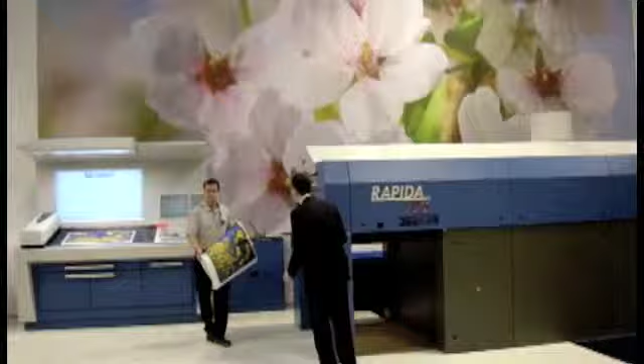It looks like the press has stopped. Marcus, do we have a problem? Oh, I see. The job's already finished. Now, our friend Gopher, the automatic guided vehicle from our Spanish partner Asti, will come to collect the printed sheets. And while the first job is being transferred to the finishing area for cutting, Marcus will change the plates and substrate for the next job.

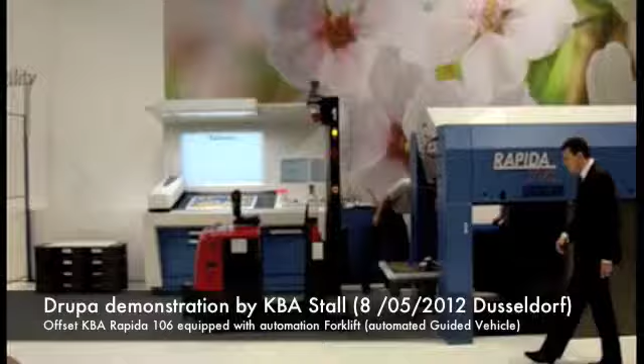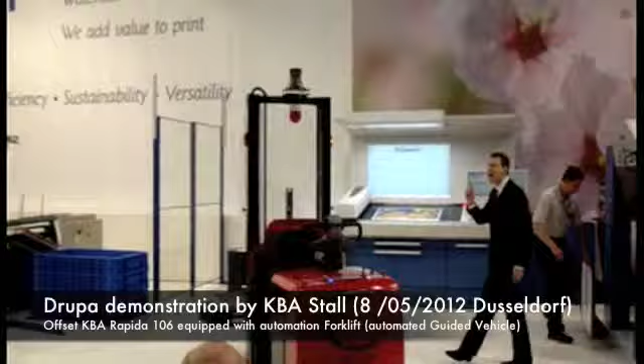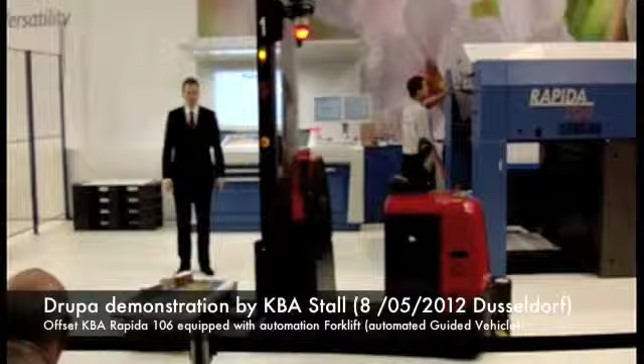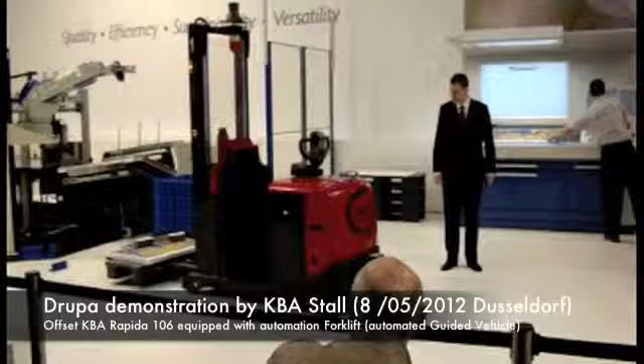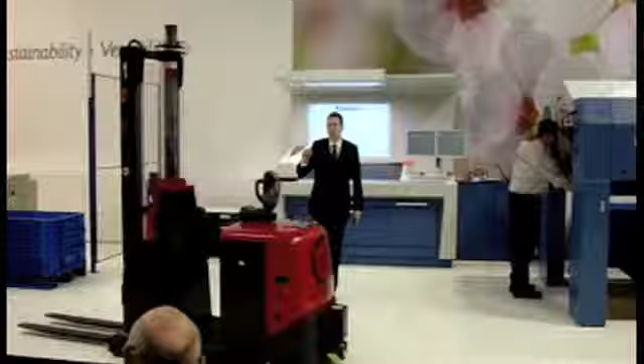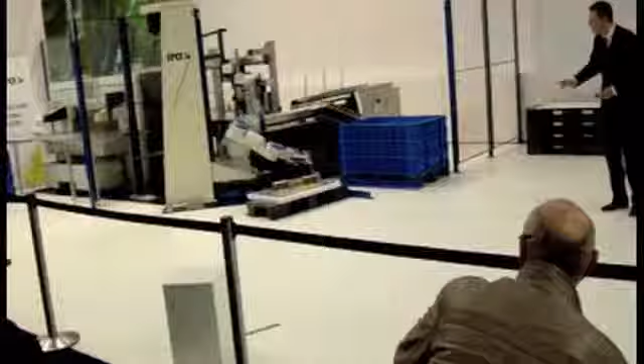Come and join us, ladies and gentlemen. We're going to have a graphic industry world premiere in about a second now. Good job, Gopher. It looks like our pallet has been delivered, and Rob can now swing into action. Ladies and gentlemen, this is the world premiere for a two-armed robot in the graphic arts industry, brought to you by Toray and IRA. Rob will look for and remove any obstructions or foreign objects. He will then check the exact height of the top sheet and get into action, lifting the paper onto the vibration table for further processing.

There is of course a limit to the number of sheets that can be handled at a time, so he will repeat this task a few times. Rob was developed in cooperation with the University of Southern Denmark and Linköping University in Sweden, and IRA has designed a proprietary gripper system and software that adapts the famous Motoman technology to the printing industry. While Rob is busy, let's come back to the press.

This particular KBA Rapida 106 is fitted with a plate loading system that changes the plates automatically in less than 4 minutes. The characteristic green-colored Toray Waterless CTP plates that are fed into the press are really special. These plates are covered with a silicone coating which repels the ink in the non-image area. The plates can be imaged by any plate setter with an 830 nanometer thermal laser.

Image resolution up to 300 LPI is possible, depending on the plate type, and a run length up to 100,000 impressions can be achieved. I should stress that our plates are developed in a plate processor that uses only a fraction of the chemicals needed for processing conventional printing plates, which means that in addition to incredible quality, the Toray Waterless process is also easy on the environment.

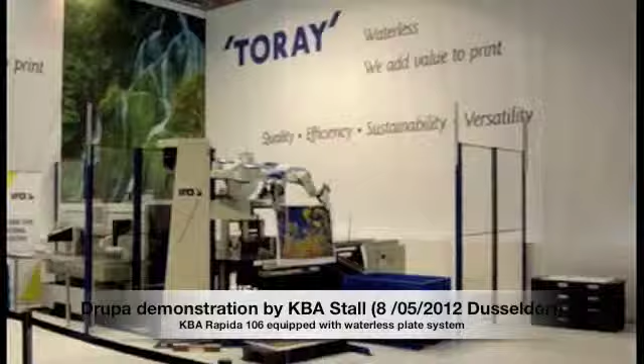Marcus is going to briefly stop the press after a few sheets to check the quality, which is a normal procedure when printing on expensive materials. In today's world, with decreasing run lengths, the low make-ready waste of Waterless has a great impact on your bottom line, and even more so when you use costly materials like print packaging and security products. Starting production with Waterless is also faster and easier than with conventional offset because there's no ink-water balance to adjust.

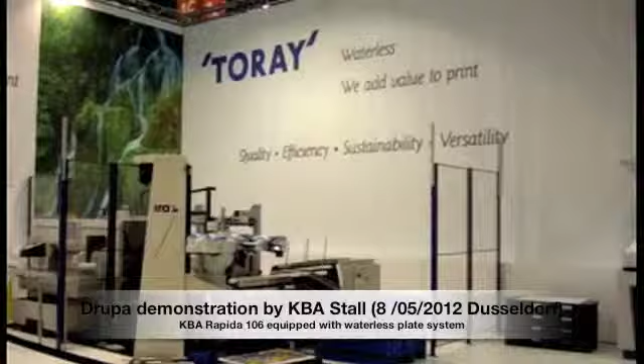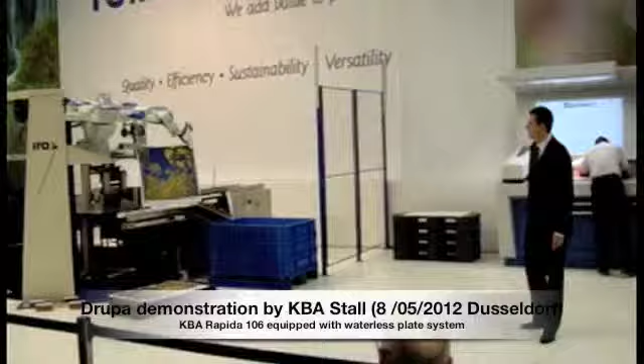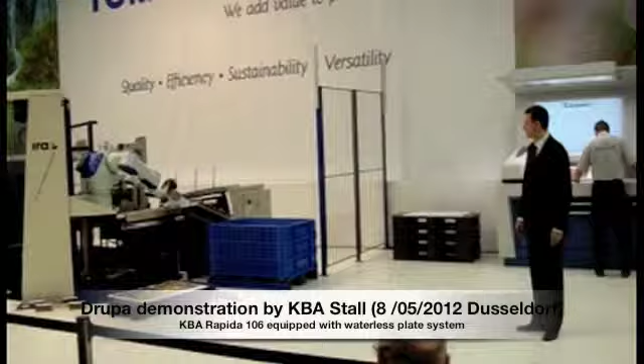Hey Rob, how's it going? Twist and shake? Rock around the clock? Shift after shift, day after day. That's no problem for this guy. Rob will never call in sick with a bad back. Look at that. Poetry in motion. That's the future, ladies and gentlemen. Could be your present, as a matter of fact. Good job, Rob. Look at that. He's even cleaning up. You know what they say in Germany? Ordnung und Sauberkeit muss sein. Good housekeeping is a must.

And now that the material has been transferred onto the pile on the jogging table, the printing job will disappear into the Perfecta cutting machine, a combination of high-speed guillotine, automatic loading module, and jogging table.

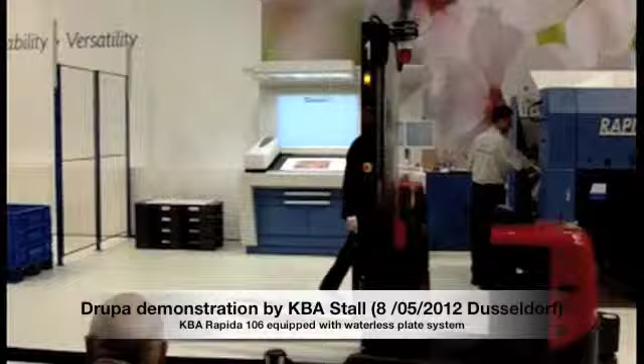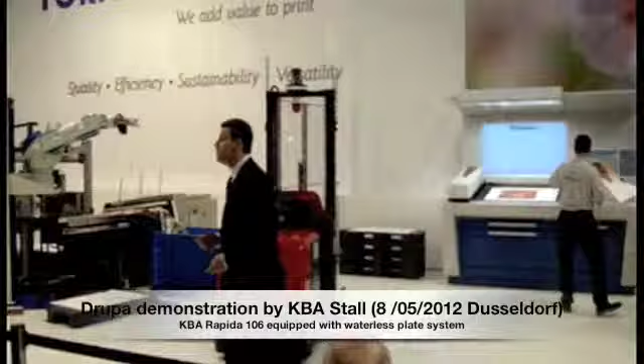Back to our process. One thing we haven't talked about yet are the ink characteristics, which play a very important role in waterless printing. Sahara UV Cure ink from classic colors lets you switch between paper and non-absorbent substrates like different kinds of plastic or metallized materials without changing the ink. And that's a critical factor for achieving maximum productivity. Waterless is such a valuable tool for printers who are seeking to expand their product range and increase their profits.

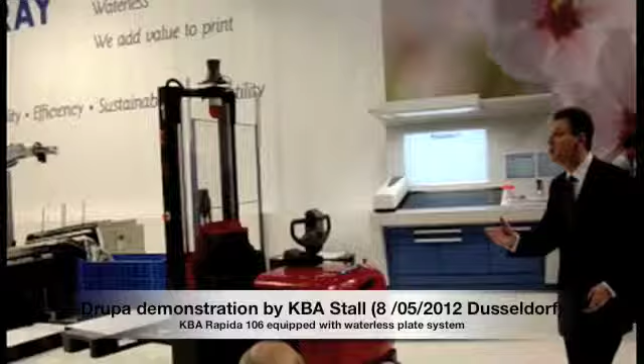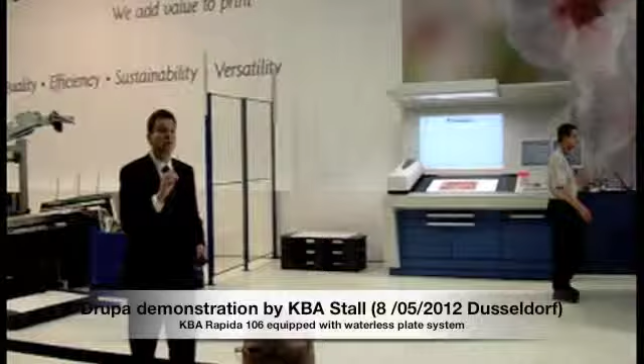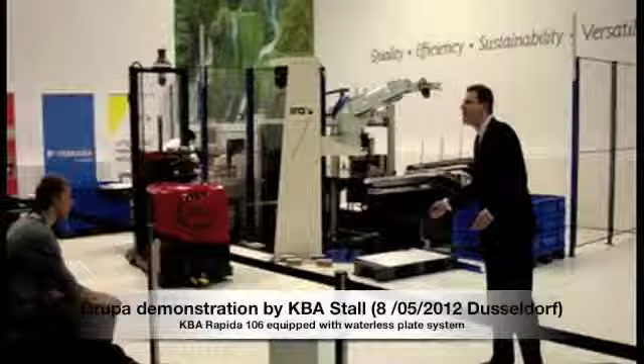No dampening water gets rid of the instability problems you get with conventional UV printing, resulting in higher quality consistency, less waste, and the elimination of all fountain chemicals from the effluent. In fact, did you know that a typical B1 format press running wet offset on 3 shifts consumes up to 100,000 liters of water, 10,000 liters of IPA, and 3,500 liters of fountain concentrate every year? Not too eco-friendly, right? Whereas waterless changes the whole equation.

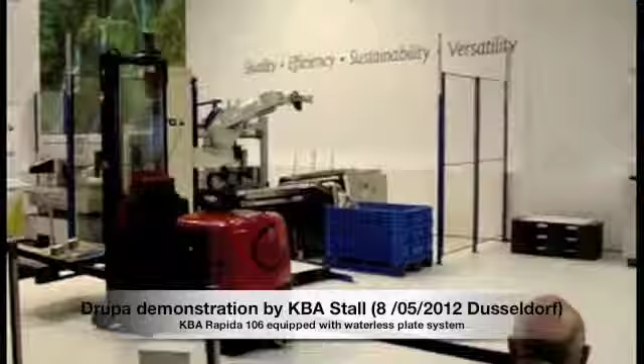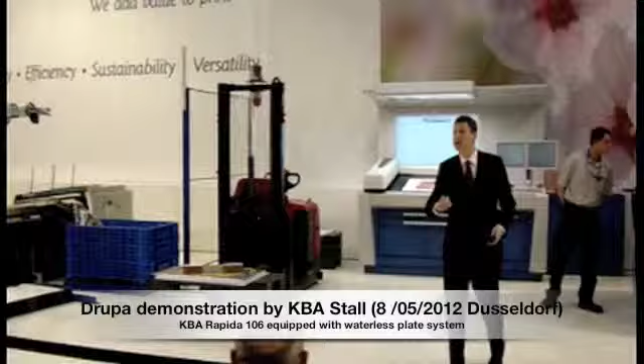With Toray waterless plates, you get a totally sustainable process that has the highest quality and environmental credentials your customers could be looking for. You'll produce razor-sharp, brilliant images with a wider color spectrum than conventional printing on nearly any kind of non-absorbent substrate like plastics, foils, metal, or even wood. And indeed, throughout Drupa, we'll be printing on lots of different challenging materials, giving you the opportunity to witness the amazing versatility and consistency of our process.

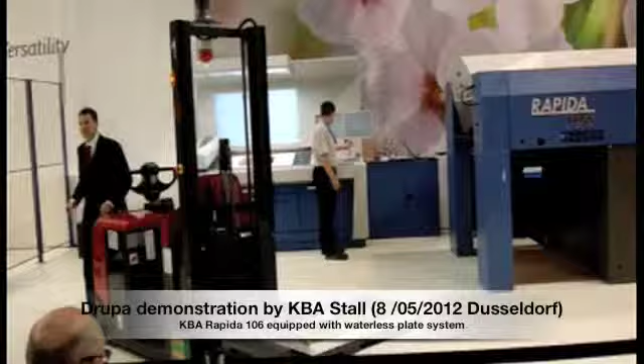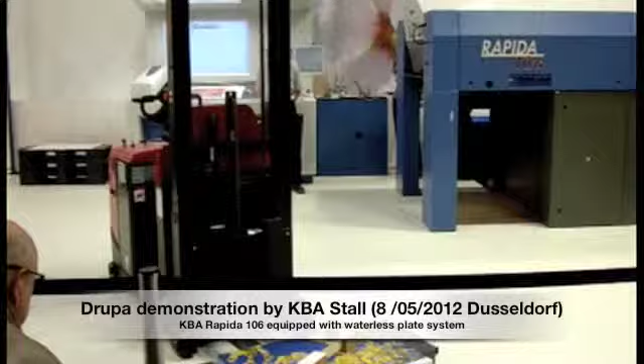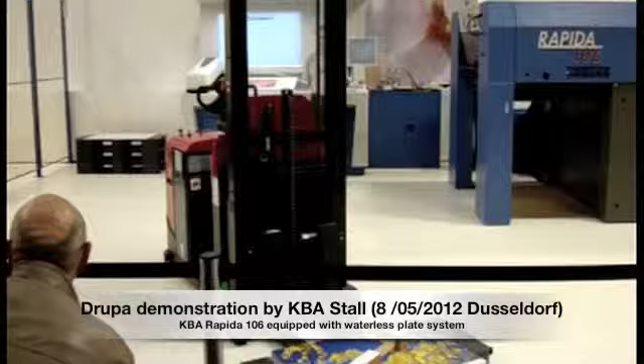There he goes. Good job, Gopher. Looking for a convenient place to set down the pallet. By the way, ladies and gentlemen, make sure once this demonstration is over to pick up a print sample. Benjamin had it right. Time is money. What a genius. You know it, we know it, and Toray's value-added on-demand waterless UV printing technology is your way to both save time and increase profits. Waterless on-demand offset, your alternative to digital inkjet.

Now, from one genius to another, the innovative compact waterless Genius 52 UV to your right will start printing in a moment. Plus, on the KBA stand just next door, you'll find the new Varius narrow web machine from KBA-MePrint. And finally, be sure to visit the Marks-3zet stand in Hall 3 for more Toray waterless solutions.